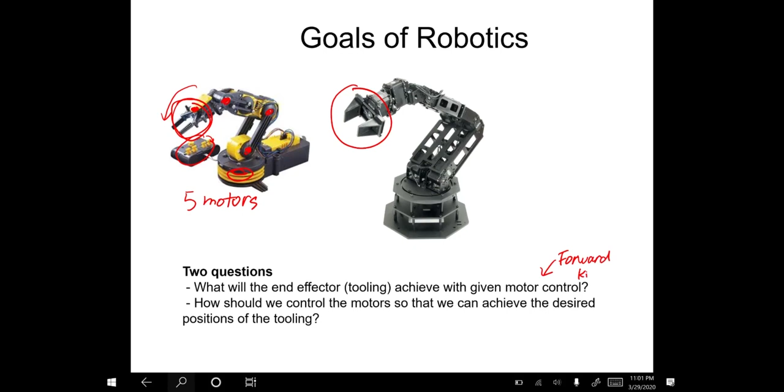We also want to understand at each time point what should be the end effector's position if we give the parameters of these 5 motors. If we want to answer these questions, that is forward kinematics. Forward kinematics means we understand the motor control: we give these motor variables, and what is the final position and final velocity of my end effector.

The second question is: now I have some tasks for the robotic arm to do. How are we going to design the coding, the controller, to control the motors so that we are able to achieve the desired positions of the tooling? If we want to answer that, this is the inverse kinematics. So from the goals of the robotic arm, if we want to understand the relationship between the final position of the end effector and the motors, we have to do some definitions and conventions.

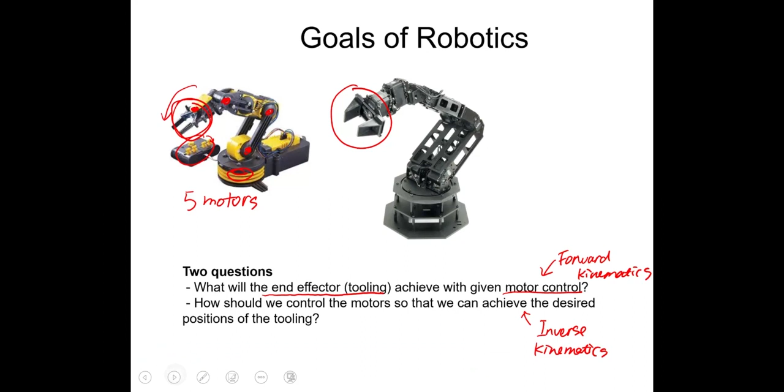So then let's start to talk about forward kinematics. Forward kinematics means we already gave the input to every motor. We already know the angles of every motor. Then we want to do the analysis so that we can understand the final position of the end effector. That is to determine the position and orientation of the end effector, given the values for the joint variables and the robotic geometry, which is the manipulator.

And in a basic robotic arm, since now we start to learn robotic arms, we assume all the joints have 1 degree of freedom. That means it is either a revolute joint or a prismatic joint. A revolute joint can only do rotation, and a prismatic joint can only do one translational motion.

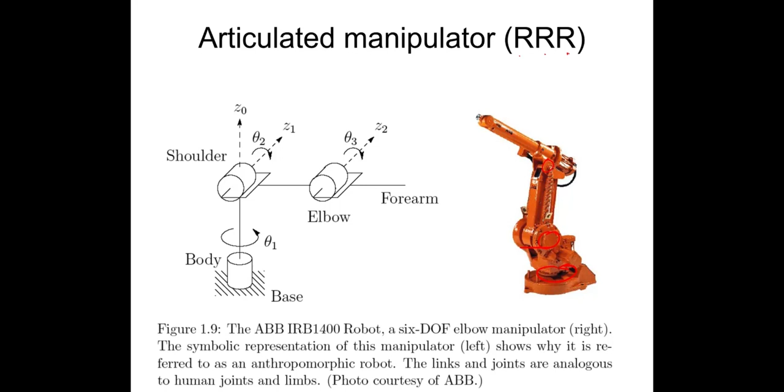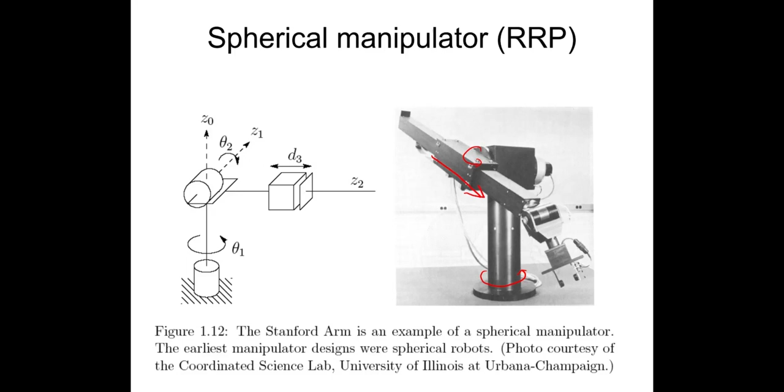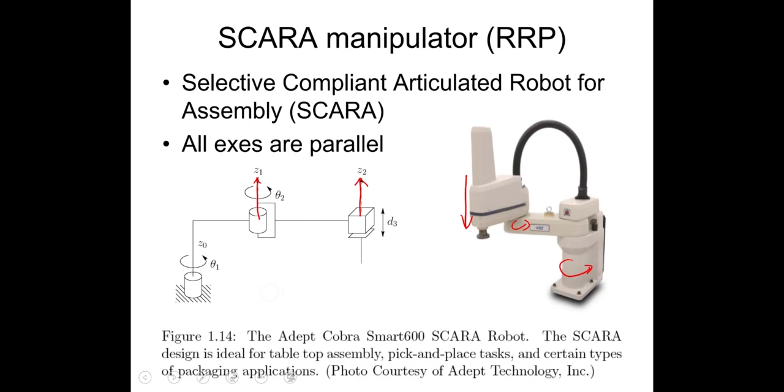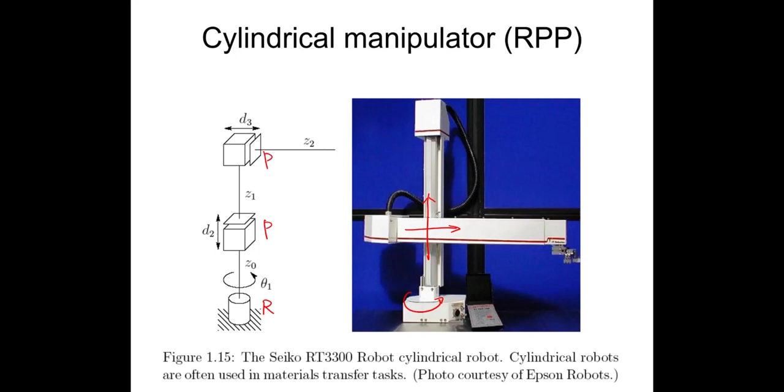And in this manipulator, we have 1 revolute joint on the base. And this thing can move, and this thing can do translational motion. So 2 translational motions. So it means 1 revolute joint, 1 prismatic joint, and 1 prismatic joint. So this is an RPP manipulator.

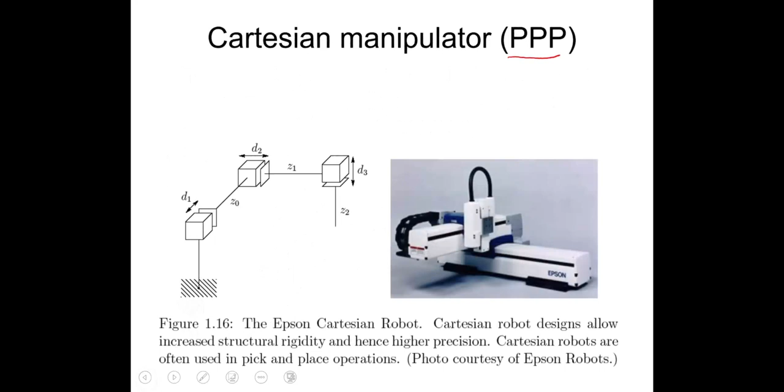So from this robotic arm modeling, robotic manipulator modeling, we can see that to do accurate robotic analysis, first of all, we need to extract the joints. And then we give each joint a coordinate frame so that we can do further analysis.

Okay, so again, for forward kinematics, we try to understand the final position and orientation of the end effector with all the known joint variables and the robotic geometry. So in this analysis, we already know the given joint variables, and then we want to know the final position and orientation.

Again, what is inverse kinematics? Inverse kinematics means we already know the desired position and orientation of the end effector. We go back to do the analysis so that we can extract the joint variables. So that is inverse.

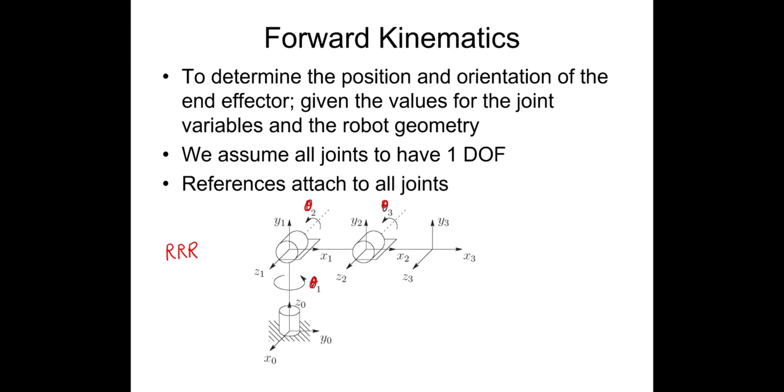So before we start to talk about coordinate transformation, let's go over some robotic conventions. You need to quickly understand these, and we need to be able to mark these conventions, these numbers of joints and links, so that we can do further analysis.

So for the robotic conventions, a manipulator with n joints has n+1 links. This is obvious: if we have, say, 3 joints, these 3 joints must connect 1, 2, 3, 4 links. Both sides of one joint must connect 2 links, right? So we always have n+1 links if we have n joints.

Okay, the second is joints. In the robotic manipulator, we number the joints starting from 1 to n. For example, in this case, we number the joints 1, 2, 3. And we define the link numbers from 0 to n, so in this case, 0, 1, 2, 3. So we have n+1 links if we have n joints, because we have the 0.

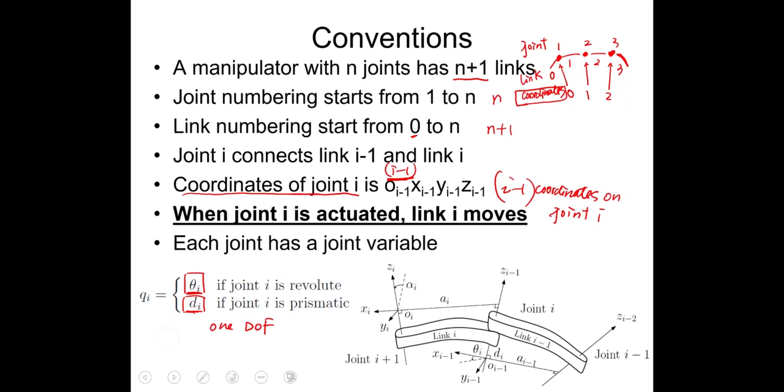And another thing in the robotic conventions is the transformation matrix. Previously, we have learned homogeneous transformation, which is the general concept of transformation. Now when we talk about robotic analysis, we use slightly different conventions. The homogeneous transformation between frame i and frame i minus 1, we define as A_i in robotic analysis.

In general analysis, this is H from i to i minus 1, right? And in robotic convention, we write it as A_i. So this is equivalent to the general definition. If we write down the general definition of this homogeneous transformation, we have the rotation matrix R from i to i minus 1, and the translational motion d. Here d is the origin's translation, so we use O instead.

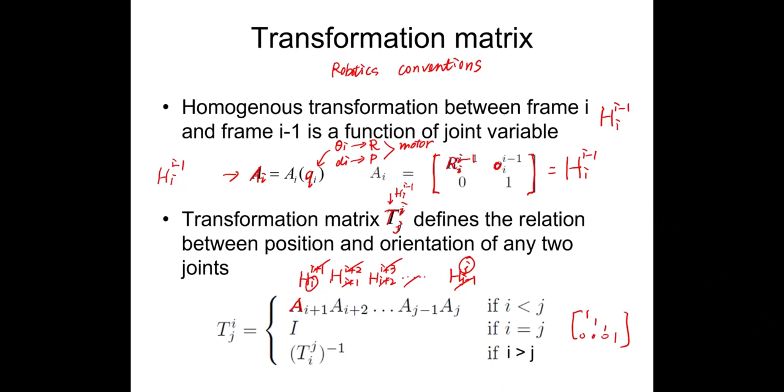Okay. So the end effector. The position and orientation of the end effector is a constant in the last frame. So the end effector is our goal, right? And if we want to understand our goal, which is the position and orientation of the end effector, we need to know the last frame, the last coordinates, which is frame n. Okay?

And the position and orientation of the end effector with respect to the base frame, which is H n 0, right? The base frame is frame 0. We always start from coordinate 0. The base frame, which is joint 1. When we number joints, we number from 1 to n. If we number links, we do 0 to n, so that we have n joints and n plus 1 links.

And if we number coordinates, we number from 0 to n minus 1 for all the joints. And the last coordinates, n, is not for the joints, it is for the end effector. Which is tricky, but it's clear. Again, in the robotic conventions, we number the joints from 1 to n. We number the links from 0 to n. We number the coordinates for each joint. If it is joint 1, then the coordinates is 0. If it is joint n, then the coordinates is frame n minus 1.

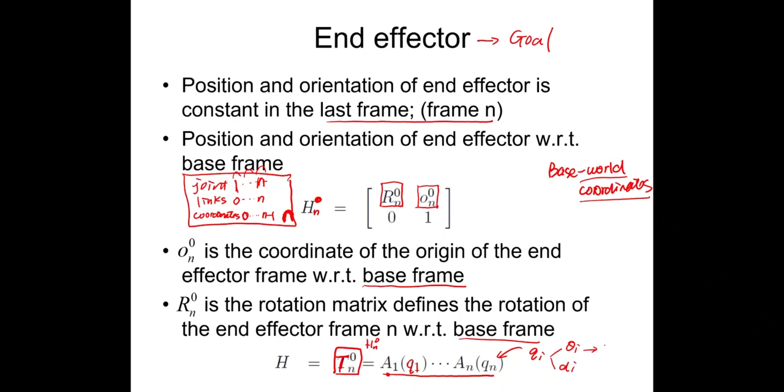And the key is we will be able to calculate this T n 0, which is H n 0, but in robotic conventions, we use T instead. And this T is a sequence of homogeneous transformation matrix multiplications, each a function of the corresponding joint variable Q1, Q2, Qi. Again, Qi is the joint variable, so it is either theta i for a revolute joint or d i for a prismatic joint.

Anyway, this T j i is a homogeneous transformation matrix relating frame j and frame i, and it is a sequence of homogeneous transformation matrix multiplications. Again, this is the rotation matrix part, and this is the translational motion part. And the rotation matrix can also be computed as a sequence of rotation matrix multiplications. But the coordinates vector, the displacement, the positioning vector, is equivalent to d, the position of the origin.